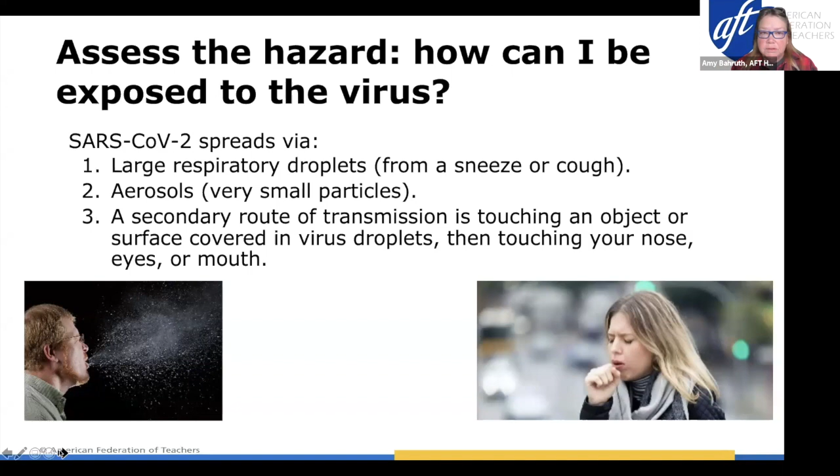It's really a respiratory disease. If we had breakout rooms, I'd have you do this, but what I want you to think about is assessing your own personal risk of exposure.

We know right now that your risk of exposure to this virus increases if you have less than 6 feet distance from people. In school settings, we're mostly concerned about special education settings because sometimes you need to be closer than that 6-foot barrier. We're worried about high occupancy classrooms and spaces and not enough air being brought in to dilute the air in that space, crowded corridors and halls. I think we've all seen the pictures from Georgia with kids passing in the halls, and it's just utter pandemonium.

Ventilation, which we're going to spend some time on, and coach or support student athletes is an issue, and anybody that teaches band or choir classes, because that spews out a lot of virus potentially. So your risk decreases when you put these things in place.

Wearing a mask, it's easy to do. Everybody should be wearing them in school. Teaching in low occupancy classrooms, so we want to keep the density down in the spaces in which we're working. We want to keep distance throughout the day, not only in classrooms, which is probably the easiest place to maintain distance, but in all other spaces in the building. We want to enhance and improve ventilation if we can, and rapidly get people who are experiencing symptoms out of the space and dealt with through the proper channels.

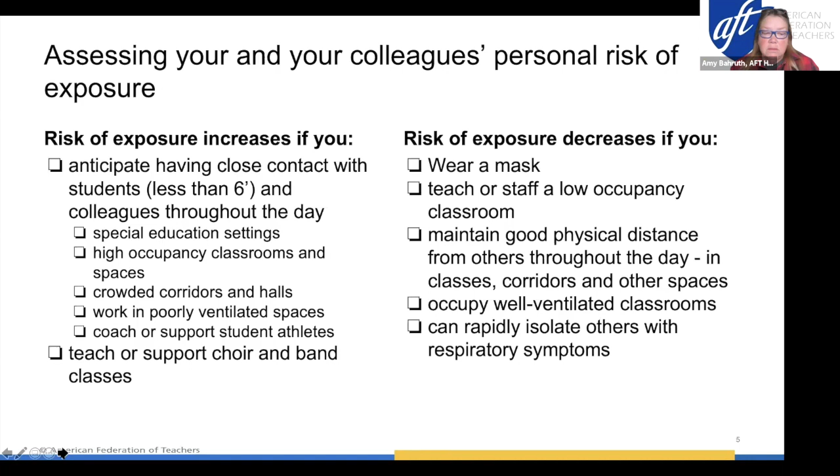Okay, so this is what we know now. Back in the end of July, AFT added some information out from our original document that was put out in April around what we think are the key things for reopening school buildings safely. And I'm going to put safely in bunny ears here because we really don't know what that means yet, because this is a novel virus. We're basically learning as we're going, and as scary as that sounds, we just don't have all the answers yet.

So all we can do is put in the best practices we know now and evaluate how well that works. This report that we put out was mainly focused on making sure community transmission in the area is under control, that there's a public health component intimately involved with the school district in contact tracing and disease surveillance, making sure that those who are at higher risk have accommodations if needed, and that the union is part of the planning process along with other key stakeholders, right? Parents, things like that.

So those are the bigger picture items, but the ones that I focus in on are the health and safety pieces. This presentation is just going to be on health and safety considerations. There are a lot of other things that may be a factor, but for this presentation and for what I do, health and safety concerns are what I'm going to focus in on.

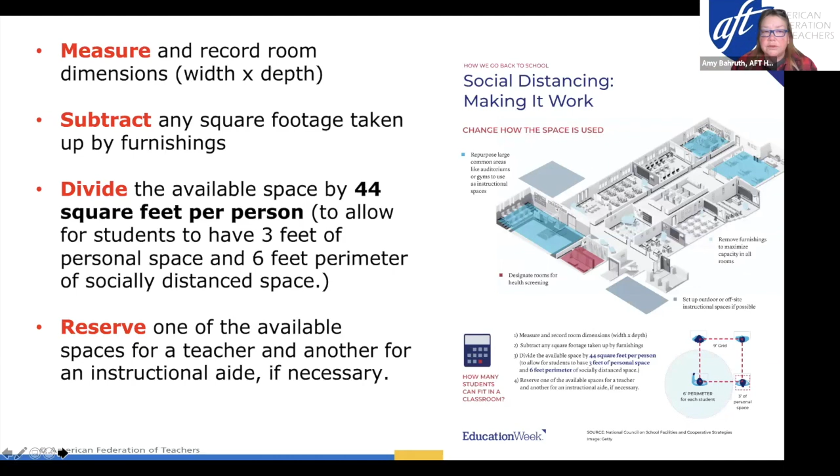So this is the graphic you're going to get on that fact sheet when you get it. But this takes a typical classroom—in this case, a 960 square foot room, so 30 by 32 with the furniture in it.

And when you do this and you remove the furniture and you put people in with this 44 square feet, it takes a classroom that's normally a normal capacity of 31 down to a capacity of 12. All right, so that's a huge difference.

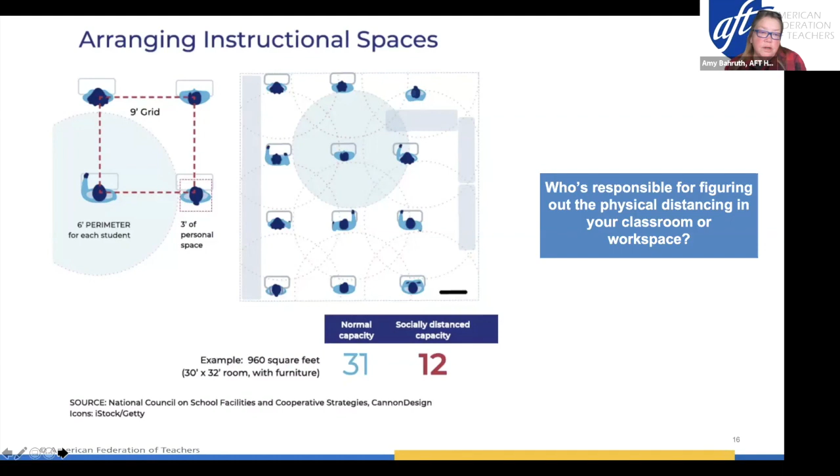And this is going to be one of the biggest challenges you face, because there might not be enough classrooms to socially distance at this level. There might not be enough instructional staff to teach at this level, right? So figuring out who's actually responsible for distancing, figuring out these metrics in your classroom is an important thing to know.

All right, so everything I show you from here on in blue, the stuff on the left-hand side, is your LOU, okay? So what we did was we took the information in your LOU related to physical distancing, social distancing, and put it in this blue box, and we also correlated that with the walkthrough notes.

So when we look at the survey, you're going to have a box to check off: is your classroom set up with 6 feet distances? If it's not, if you look at the second bullet, if these guidelines cannot be implemented, they have to put in alternative options—that might be a reduction in the number of students or an alternative classroom setting. Okay, so this is what's in your LOU.

So this is primarily what you need to focus in on, because you want to make sure we have these things in place.

All right, the second part is on the removal of furniture, excess furniture, and if there's proper signage. So these two things in blue, again, in your LOU. We want to know: have they removed the furniture? If you don't need it in your room, it should be out, right? Because you need that space.

Have they put signage or any kind of barriers, even if it's just tape on the floor, to mark things out to help maintain that 6 feet separation? And really you want to look at not only your classroom, but other occupancies in other parts of the school, right? That covers staff, students, and even visitors that come in through the building, okay?

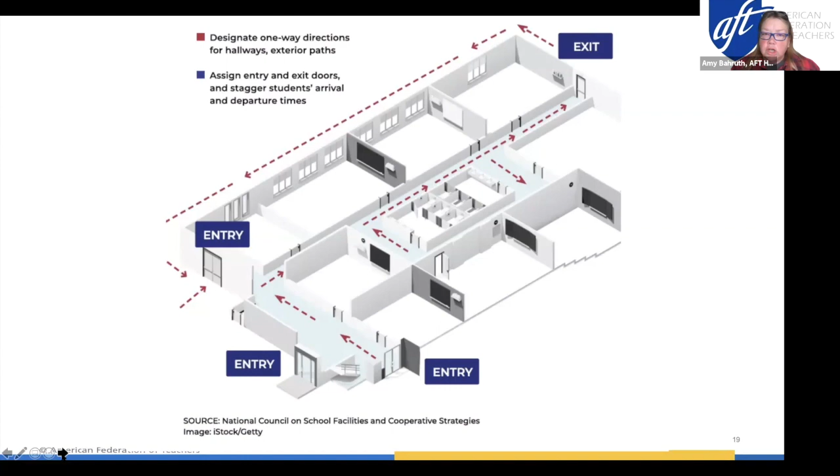This is also from Education Week, and they talked about designating directional flow for hallways and stairwells. So this is just an example on how markers should be in the school to do directional flow in a building. Your LOU talks about this in the second bullet, where it says if the layout allows, schools will use one-way hallways and stairways to avoid crowds in hallways.

Okay, so this is what they've said, if it allows. So we have to figure out: is that happening? And if not, why is it not happening? What are the barriers for that actually being able to be put in place?

Your LOU also talks about limiting the number of people in either restrooms or elevators, okay, to 2 at a time. So my question is always, well, who's going to be the restroom, elevator, and hallway police, right? Who's doing that work to make sure that that's actually happening?

So the questions I have on the walkthrough notes—you're going to get copies of this, so don't freak out. I know I'm throwing a lot of information at everybody, but these are the kinds of questions you're going to see in the survey that we need to find answers for, right?

What controls are in place to prevent congestion in restrooms and elevators? They can't just say that they're going to be limited—there has to be a plan in place to make sure that's actually happening. Okay, same thing with lining up in the morning even to come in.

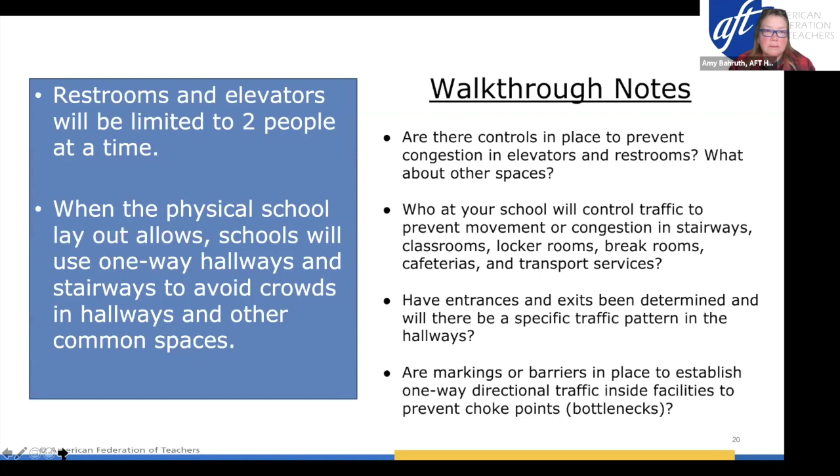Are they going to have separate entrances by grade? Are they going to have separate entrances by area in the building? All these kinds of things have to be considered before the first day you go back to brick and mortar buildings.

So those are some of the considerations. I'm going to touch briefly, I know we don't represent any bus personnel in Miami, but riding on the bus, there's 2 ways you can do it. If you don't wear masks, it's going to be a very limited bus. If you wear masks, you can have a couple more, but normally you're going to reduce the capacity to almost half in any situation.

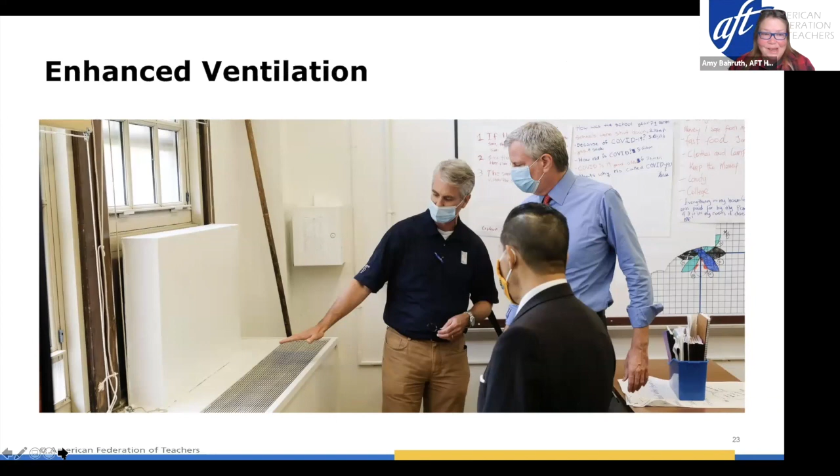Everybody still with me? All right, so I want to talk a little bit about ventilation. This is probably the more technical piece of it, but I'm going to say right off the bat, you don't need to be an industrial hygienist to do anything on this checklist. We are going to get you through this, and it will make sense. I learned things from Michael today that I didn't know about Miami.

So first thing, the reason ventilation and filtration is so important is that any indoor space needs to be diluted by bringing in air from the outside. It's a system where you bring in outside air, it recirculates with some mixed air, and then is exhausted through the system. So the ventilation is important, and the filtration is important.

And we're going to talk a little bit about filtration. There are certain filters that you can use in mechanical systems to help remove some of that virus if it's in the air as it's going through the system. We're really trying to design this so that air doesn't blow from one person into another person's face or space.

Our position at AFT is, and I'll share a fun story if you're not paying attention to all the fun CDC stuff that's happening, that SARS-CoV-2 is transmitted both by large droplets and otherwise. The large droplets relate to the 6-foot distance. When you sneeze, cough, sing, or talk loud like me, any droplets that come out of your mouth that are big generally will fall between 3 to 6 feet, which is why the 6 feet marker is so important. The problem is that not all of those droplets are large and fall to the ground.

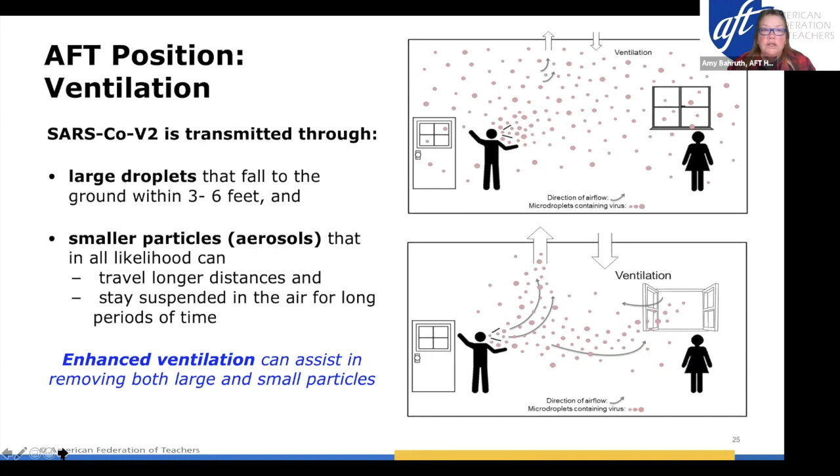So what I learned today is that you have 3 different kinds of filtration systems in your buildings. You have windows with window units and an exhaust only system, you have ceiling AC units, and you have HVAC systems. We can work with each of these to enhance some ventilation, but it's important that you know what kind of systems are in your building, because that's the only way we can help you address some of those concerns.

And you probably, in most of your buildings, have multiple types of systems. So you might have in the cafeteria or the auditorium a mechanical HVAC, heating, ventilation, and air conditioning unit, but in your individual classroom, you have a ceiling AC unit.

So just so I can see what you know here, let me see how I do poll 2. Let me know what kind of ventilation system you think you have either in your school or your classroom.

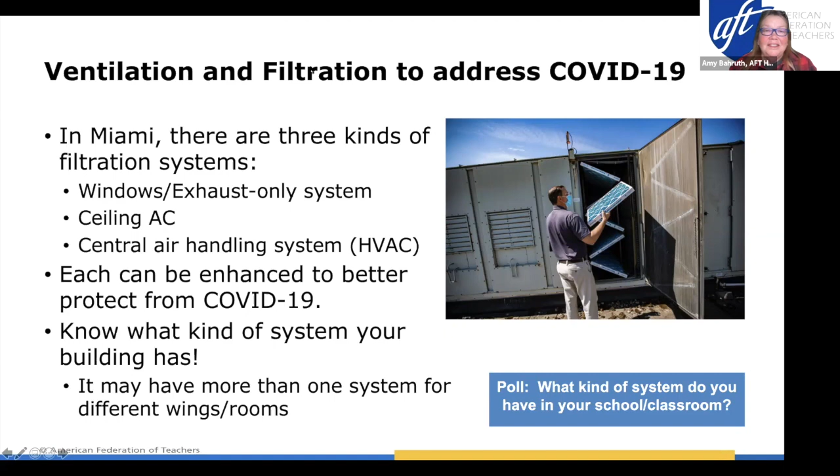So, for the most part, this is all going to be new information for you, and you're going to learn stuff about health and safety, ventilation, and MERV filters that you never really wanted to learn. But you're gonna, if we can. So that's a good handle for me, because I'm going to explain these systems a little bit just so you're comfortable with it.

So if you have just windows, okay, like say you have windows and that's the only thing you have in your school, which is kind of common where I'm from. But in Florida, I think you need air conditioning in almost every space. But the way that would work, similar to the air conditioning system suspended from the ceiling in your case, is that for the windows, you have air that comes in through the windows or the spaces between the windows that brings it in, and it is pulled out and up through the ceiling and to the roof to a central exhaust fan.

And so it's like a circuit. So the air comes in, and then it does the good stuff it's supposed to do in your classroom, and then it's sucked out through the door, either vents in the door or above the door, and comes up through the ceiling and exhausted through the ceiling fan.

I'm pretty sure, although I'm going to double check because I do not work frequently with air conditioners suspended from the ceiling, that may be the same type of situation where you have an AC unit in either your windows or your ceiling, but it's still exhausting through a central exhaust fan in the ceiling. But I am gonna follow through and do a little bit more digging around how those systems actually work.

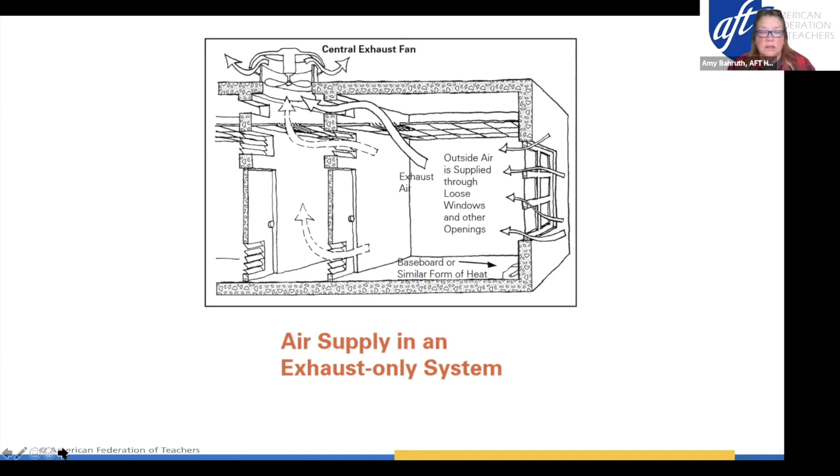So when you have situations like that, especially with windows, it's a really hard thing to control for, because the way that it's usually done if you have windows is you have to have windows on both sides so that you have cross ventilation like in your house, or you have to have the door open and a window open to create the flow.

And the door opening issue is a security issue. So we're running into problems where people can't keep their doors open, and that is leading to problems with ventilation. So there's a lot of problems: security, it's not filtered, it's noisy. You know, in Florida, it's always hot. So those issues are a problem.

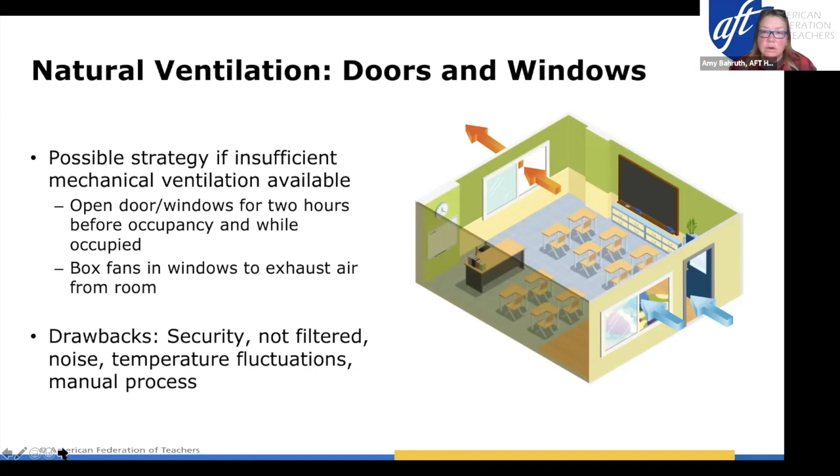For HVAC systems, I'm not going to go into great detail here, but when you have a central system, at the top of the system, up on the roof most of the time, you have vents that are drawing in outdoor air. I used to call it fresh air, but I don't really call it fresh air anymore. I call it outside air because it depends on where you are, how fresh it is, right? So you have outside air, outdoor air that comes in.

What's happening here is that it's mixing with return air. So you're breathing in this room, you have a whole bunch of people, you have an exhaust vent that's drawing air up, and it's going up into what's called a mixing chamber, okay? So air that's coming in here will then get remixed with the recirculated air and then be pumped back into your classroom. So when you're sitting in your classroom, you're never getting 100% outside air. You're getting, depending on how the system's set up, 15 to 20% outside air to 80 to 85% recirculated air.

So this is why ventilation is so important with HVAC, is because we need to make sure that the filters on this system that's cleaning that air are at the best that we can get for that system, and that this outdoor air is being brought in at a higher rate than normal.

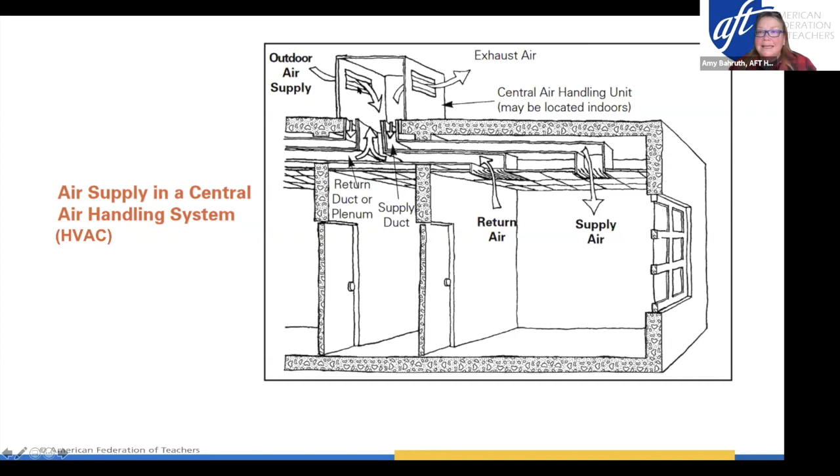And I'll tell you what that looks like. I hope I'm not losing people here, because ventilation is scary to a lot of people. But there are recommendations that the CDC has adopted from ASHRAE, the American Society of Heating, Refrigerating, and Air-Conditioning Engineers. These are the people that design all the big ventilation systems, and they have a lot of recommendations that CDC has added to their guidance for K through 12 schools. It's really designed to increase the delivery of outside clean air to dilute anything that's inside that space. So that's what I'm talking about.

We're talking about increasing the outdoor intake and maintaining these systems. They're incredibly complicated. You have systems with all these louvers, belts, filtration systems, and cooling coils. It's a very complex system, and somebody has to spend a good chunk of their day making sure they work properly and are all calibrated right. That's why ventilation really keeps me up at night sometimes.

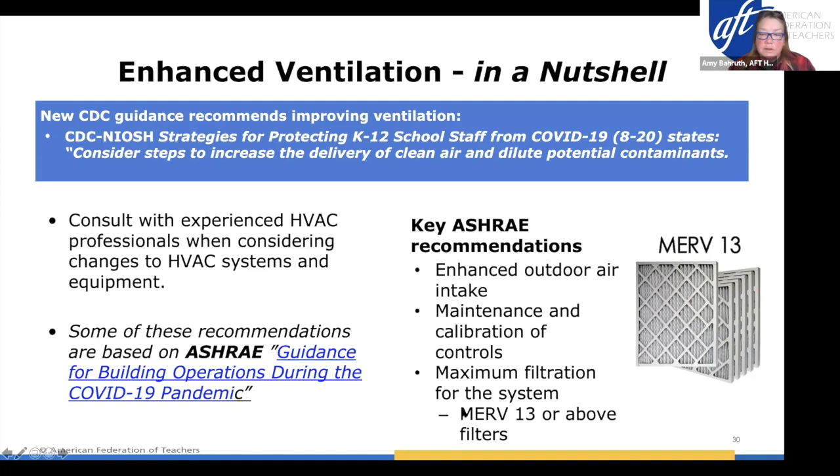The other recommendation is that these systems are tested to make sure they're working right. And one of the other recommendations we have is, if there's a possibility of getting the district to purchase them, they sell both portable and wall-mounted CO2 air quality monitors.

CO2 is what you exhale when you breathe. So in a given space, we use that as an indicator gas. It's not harmful in and of itself unless it's way crazy numbers. But if you start to see an increase in the CO2 levels, it means that either the space is too crowded or there's not enough fresh air or outside air coming in to dilute what's going on.

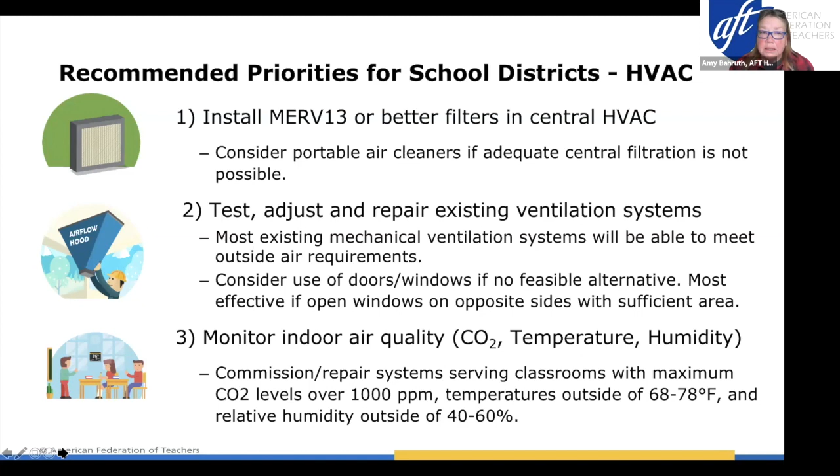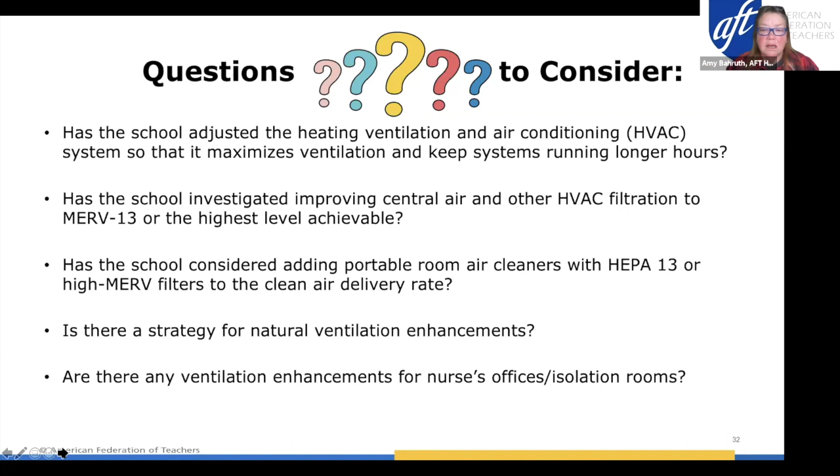So your LOU doesn't have any specific agreement on ventilation, so I just put in here the things that I think are important for you to look at. Most of you will not be able to get the answers unless you're friendly with the custodial maintenance guy or person who is responsible for these systems. Perhaps if you can get information from the school principal or the facilities person, that would be great. But these are the kinds of questions that we really want answers to before we have people go back in buildings, including ventilation enhancement for nurse's offices and isolation rooms.

All right, moving on. Number 3, we are at cleaning and disinfecting. This is the one that a lot of people fixate on - cleaning, cleaning, cleaning - and it's probably the least concern as far as transmission of this virus. Doesn't mean you don't clean and disinfect, it just means you don't have to go full tilt boogie with bleach and all this other stuff. Actually, the coronavirus is a very fragile virus.

If you use soap and water, it breaks the outside shell of the virus and kills it. So just soap and water will kill the virus.

But even with that, you need to have a system in place. You can't just go straight for the disinfecting, right? You can't go straight for the spray guns and all that kind of stuff. You first have to clean the surface, and that is microfiber cloths and a cleaning detergent. It can be soap and water, it doesn't matter what it is. You have to clean surfaces first before you can disinfect them, because if you just disinfect them, it's just a coating on top of the dirt, and it really doesn't get to the removal of the germs.

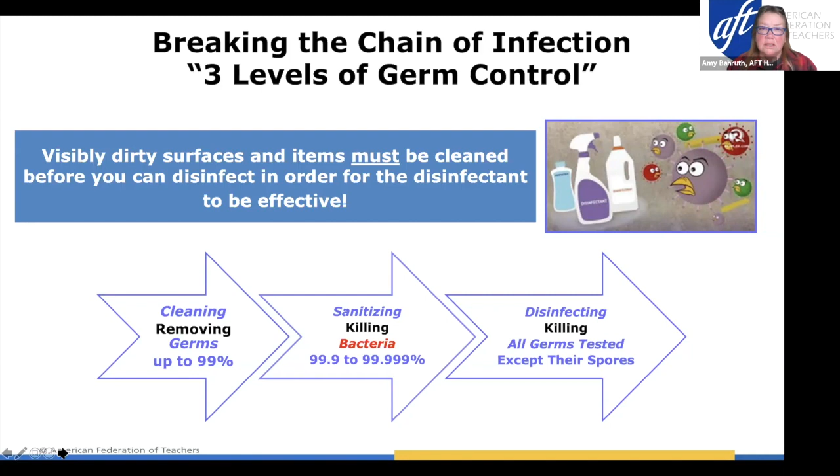So it's very important that there are 3 levels. You have to clean first. If you choose to sanitize, it gets most of it, but most people are going straight for the disinfectant, and that is where you're going to kill all the germs. I'm sure you're using EPA-approved products, so I can follow up with that, and get your safety data sheets on your chemicals so I can follow up with you on that as well.

So you have a lot of information in there around cleaning in your LOU, basically that workspaces are supposed to be regularly sanitized. I have no idea what that means. You need to find out what that means. Does that mean they're going to do it in the morning before students come, in between classes, between the use of shared surfaces, before and after meals, or is it just going to be at the end of the day? That's a question, they have it in here.

I think you need more information. You need to know what the disinfection and cleaning protocol actually is and who's going to be doing that work. In the LOU, it also talks about paraprofessionals doing some of this work. That's fine, but people need to be educated on how to protect themselves if they're using products that they've never used before. Once we find out that information, I'm happy to help with that too.

You're not covered by OSHA in Florida, unfortunately, but public workers in other states have what's called hazard communication. They're covered by the hazard communication standard, which would require training on the chemicals you're going to be using, how to use them properly, how to protect yourselves, and what personal protective equipment they should be using. And quite frankly, Carla, if the school district's not going to do that for you, I'm more than happy to help you guys if that's something you're going to be responsible for doing.

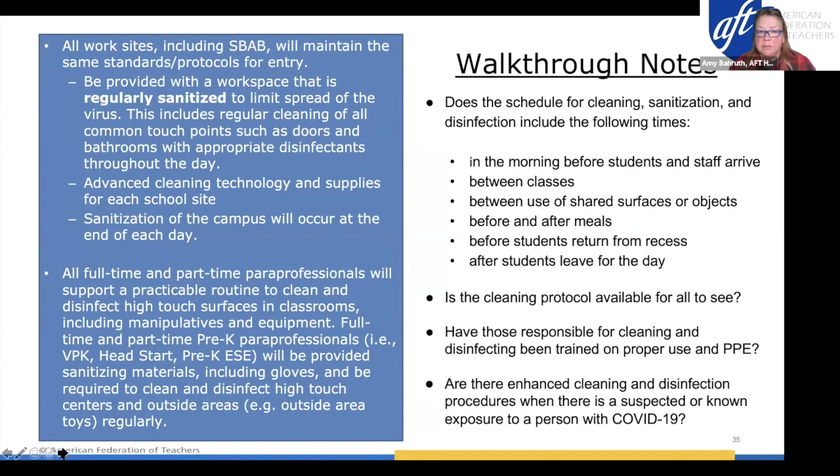Anyway, that's a big thing for me. One of the concerns we have, because people are chemical crazy with these disinfectants, is that certain chemicals like bleach and things like Lysol that have terpenes in them are asthma triggers for people, for adults and for children. We want to make sure that kind of stuff isn't happening with the cleaning protocols that are in place. So I'm just throwing that out there.

All right, our next area of focus is face coverings. At least I'm very happy that you're requiring face masks for everybody in Miami. That is not the case in other school districts across the country. I want you to know that face coverings are not considered PPE. They are face coverings, but they should be required in all indoor spaces in schools.

You're going to need, one of the things that's not on the checklist but for you to keep in mind, the ability to have mask breaks, and what that means and what that looks like and where that happens. Wearing a mask for 6 or 8 hours at a shot is not fun. They get hot, they get annoying, people start touching their face, and that defeats the whole purpose. So what I want you to know, and I think people know this by now, is that it's very limited protection. It's mostly for other people being protected from you than you being protected from other people. It's mostly designed to protect you from any large droplets or splashes within that 6 feet.

The problem with face coverings is that when you wear something like a respirator, you have a really tight fit, which prevents any of those smaller aerosols from getting in from behind that mask.

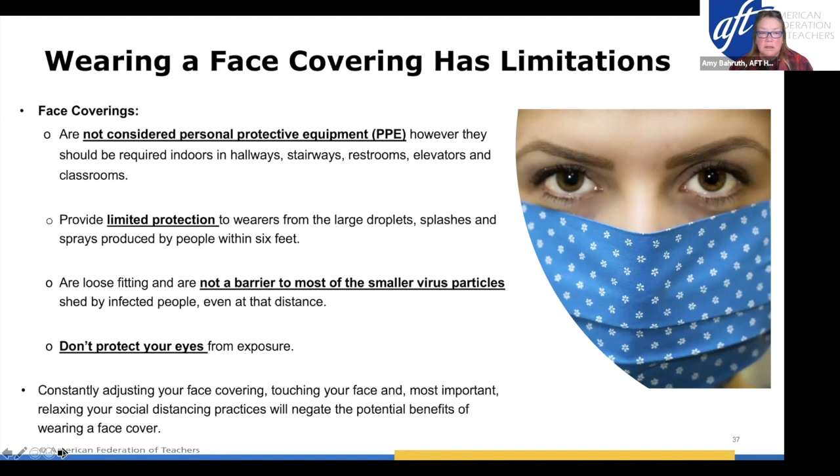But if you wear a face covering, there's lots of holes in that. It's not a tight fit, so it's limited protection. They don't protect your eyes from exposure. And like I said, I see it all the time, people are wearing face masks and they're touching their face, they take it off, they stick it in their pocket. It's going to be an issue because kids really don't know how to use these well either. So it will be an issue.

It could be a face shield, which is something you wear from here on the forehead down below your chin. That would be in addition to a face covering, and gloves.

So think about who in your school might need extra protection. For me, besides the obvious of the nurse, it's anybody who works with special needs children who need to get close to those children.

We have paraprofessionals and special ed aides that are responsible for diaper changes. They're responsible for feeding. They're responsible for lots of different activities that bring them very close to that student. And it's our position that those folks should have personal protective equipment equivalent to what a nurse would have for those exposures.

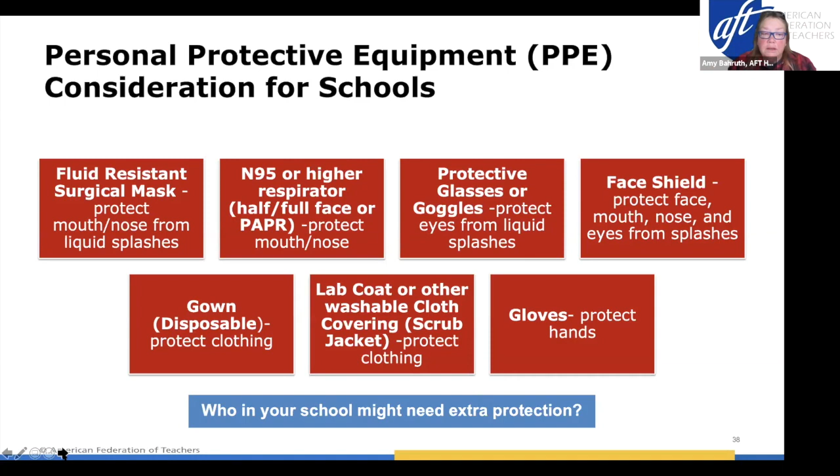We do have some information from the LOU that I'm very happy that they're requiring everybody to wear a face covering. The one thing, and I can't wait to see it, is what the mandatory professional development is regarding the safety protocols. I hope it's not one of the videos they have on their website only. And that the schools are maintaining a supply of facial coverings for employees to make sure that they have consistency in the wearing of them.

So that's a good question to ask. I'm assuming, but tell me if I'm wrong, that students will be required to bring and wear their own masks. And that's a whole other set of complications with that. And I'm hoping that the school also has a supply of face coverings for smaller people if they forget to bring their mask or, quite frankly, don't have one from their home.

So the question is, the employer, the district really should be doing an assessment to determine who needs additional PPE and that they have enough of it in their stock for the foreseeable future.

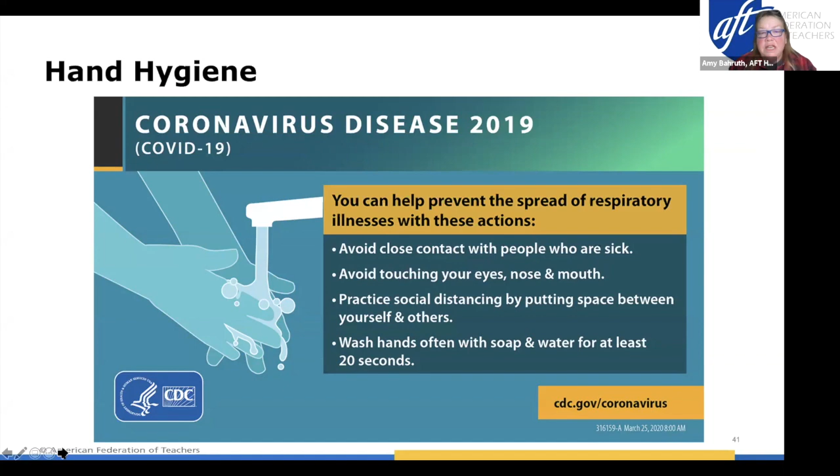So hand hygiene, okay? I think people are probably sick of washing their hands. It's so important. It is the most crucial piece here for spread, for people touching things, all right? So we need to have a good protocol in place for hand hygiene.

You have great concepts in your LOU, right? Soap and hand sanitizer has to be readily available in all bathrooms and common areas. We want to make sure that's actually happening. I can't tell you how many schools I've been in where you walk in and not only do you not have soap or paper towels, but you don't even have warm water. So we have to make sure they hold their end of the bargain up and that stuff is all available.

You guys agreed to hand sanitizing stations in high traffic areas and on the school buses. Excellent. What I will say about hand sanitizer is it's a temporary gap, a temporary measure until you can get to a proper facility to wash your hands. So if you're getting on the bus, getting off the bus, when you get to school, you should wash your hands. It's only a temporary solution, and we really need to get into a routine of routinely washing our hands, even when we don't think they're dirty.

So one of the things I'm really concerned about is whether there will be schedules or breaks in the day where students can go wash their hands. It's going to be really hard when you can only have two people in a bathroom. So we have to figure out how our kids and even adults are going to have access to go wash their hands. It's a big issue.

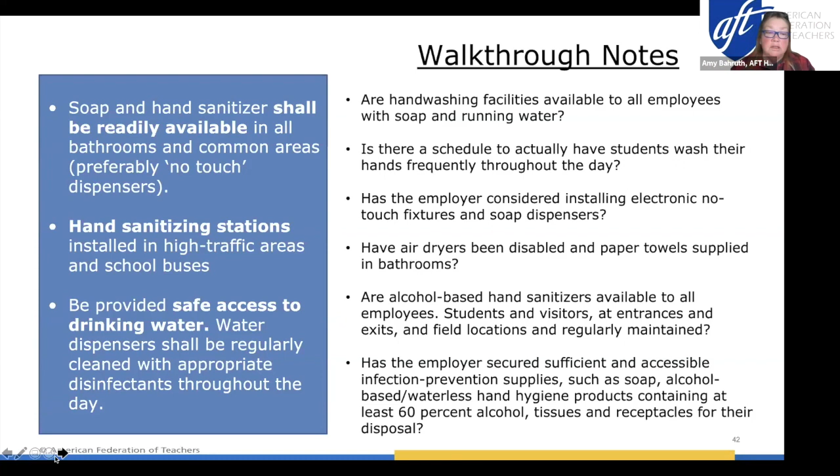This is in your LOU, not in your checklist, but I just want to reinforce that you have a great LOU in place, that staff will have to do daily screenings upon coming in. You'll get a little badge that you can say that you got to school and completed your screening. And that, if you report that you've checked off some sort of symptom, you're going to get compensated for the day. So just something to keep in mind.

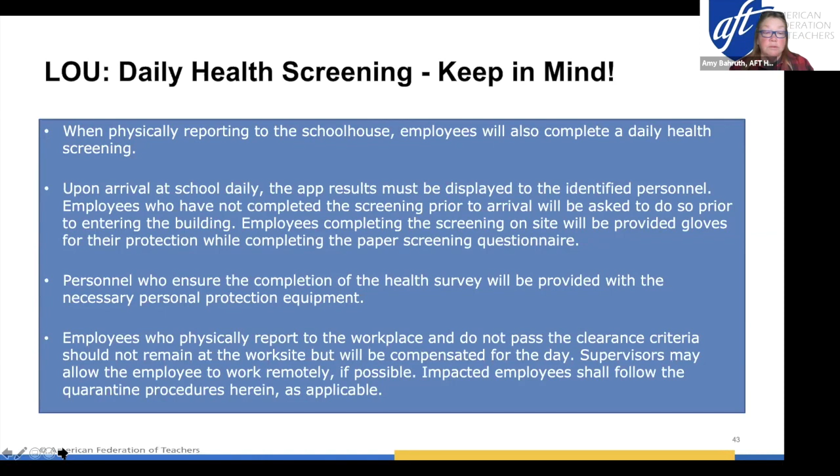I know for me personally, it's allergy season, and you can probably tell by my swollen eyes and my very raw nose. I look like Santa, I have a very red nose. Allergies are kicking my butt. So we have to make sure that those kinds of things don't kick people out from coming into the building for routine things that are not COVID related.

Some of the things also in the LOU are around getting students who are exhibiting symptoms to an isolation room. So an isolation room is someplace where students should go that is completely separate from any other place. If you have a nurse's office, you're also going to need a separate room for an isolation room, because if I'm a kid coming in for a Band-Aid, I don't want to walk into the nurse's office and be in the same room with students who are in quote unquote an isolation room right next to me. So we want to make sure that's a separate space.

When it says it's monitored by appropriate staff or a school administrator, that's great. You guys were able to negotiate that it's not any of you doing that work, which is good. But we want to make sure we know who's ultimately responsible and what happens if that person or the school nurse is out. What's the backup plan?

One of the big things with the nurse's room and the isolation room is having enhanced ventilation. This is where you really want to make sure you have good ventilation, and you might even need to bring in things like portable HEPA units. They're about $300 at this point, but it's an investment that should probably be considered in isolation rooms, because that's going to clean the air in that room only, so it doesn't get out into the rest of the ventilation system. And you may have enough space in those spaces to provide that physical distancing.

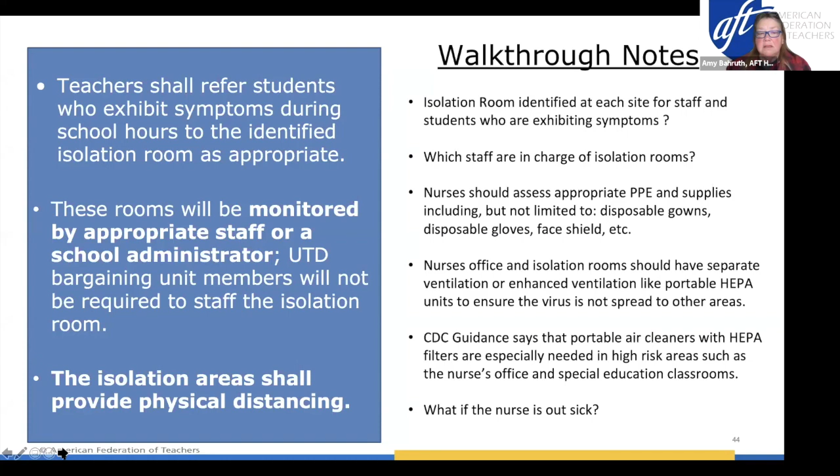All right, so let me just... okay, there's so many questions, I don't know how to do this. So I think what I'm going to do right now is show you the actual instrument, and then I'm not sure anybody can talk in this, but maybe we'll go to the chat and see if you have any particular questions. And then we'll come back and finish up this. So I stopped that, give me 1 second. And I want to go here.

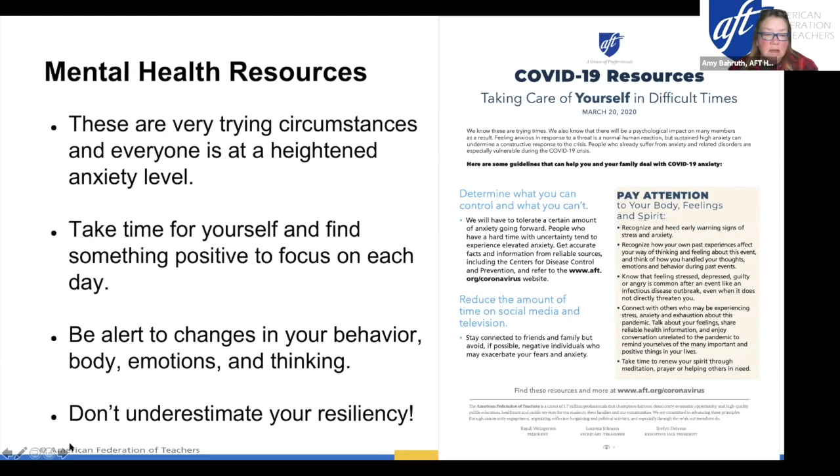I'm going to make sure that Carla and Michael and Nat have this, and we have another one with other resources, just so, I just threw a ton of information at you and maybe scared some of you, and I don't want to do that, okay?

And then, just to wrap it up, the survey data is going to be incredibly important to Carla and everybody, because it's going to be used to build a campaign to keep people protected, right? We want to make sure communication is key, that we want to have a point person in the schools, and we want to have written protocols in our hands, the health and safety concerns we talked about.

And the last thing I just want to point out is that everything I'm talking about, everything we're asking you to look at, is all an experiment. These are living documents. We have to change as we learn more information, and where we see things that are not working, we have to adjust. So just because there's a plan and there's a very pretty PowerPoint from Miami-Dade, the school district, it really doesn't have a lot of meat. We have to make sure that we can change these plans as we learn more information.

So with that, lots of talking at you. I'm really sorry. I don't know if anybody wants to direct questions to me, because I haven't really been paying attention, but I see there's 63 comments in the chat. So I don't know what you want me to do from here.

Yeah, so Amy, first I want to start off by thanking you. Thank you very much for your expertise. You are an expert in this, and we really appreciate the valuable information you shared with us. I think a lot of the questions in the chat are very particular to the LOU, which obviously you came to give us a general overview of what we should be looking for in our school sites, in particular to our classroom settings or work settings, so that we are in safe places when we're back at work.